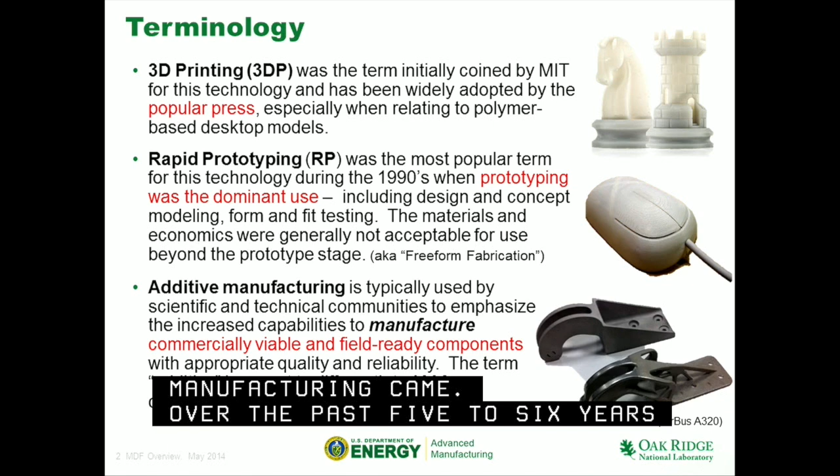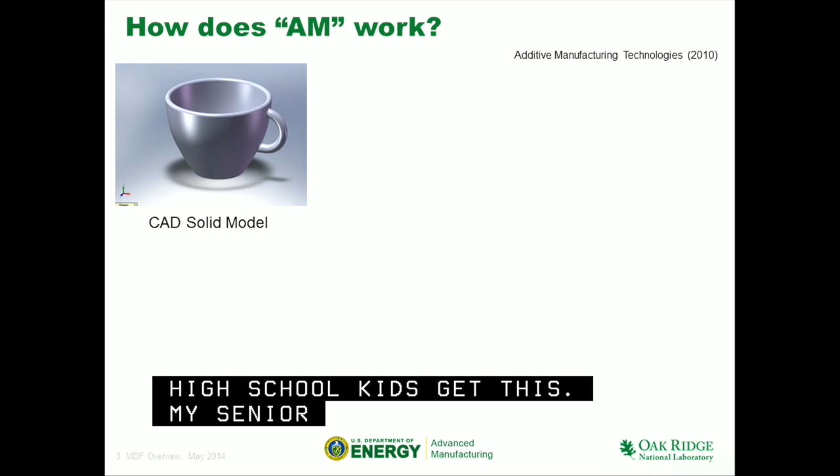The process is really simple. High school kids get this. My senior engineers sometimes struggle with this. You start with a CAD model, a three-dimensional model, and you create a standard file format, just like when you're using a word processor and you'll save to a PDF.

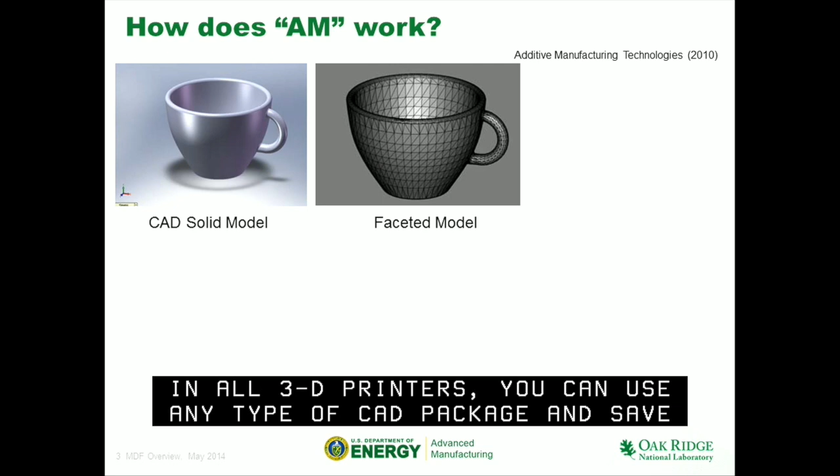In all 3D printers, you can use any type of CAD package and save it to a uniform file format called an STL. And then that STL can be used to come up with what they call slices. So you're taking this three-dimensional model, you're slicing it into layers, and then coming up with tool paths in which you're going to start to layer by layer by layer grow your part.

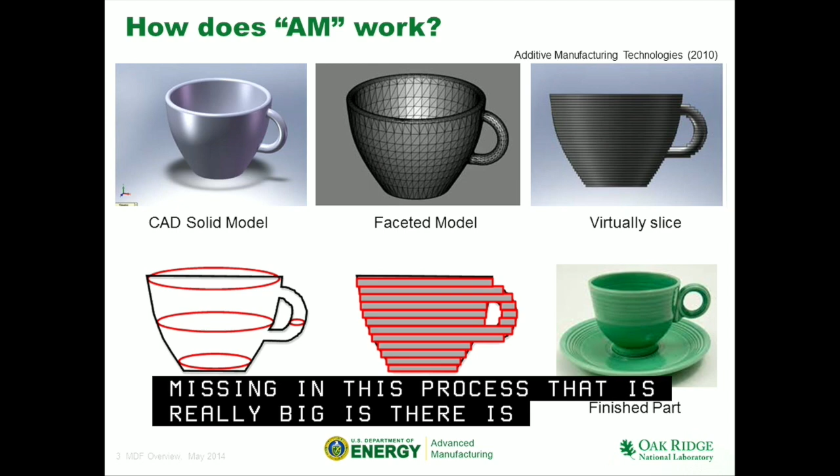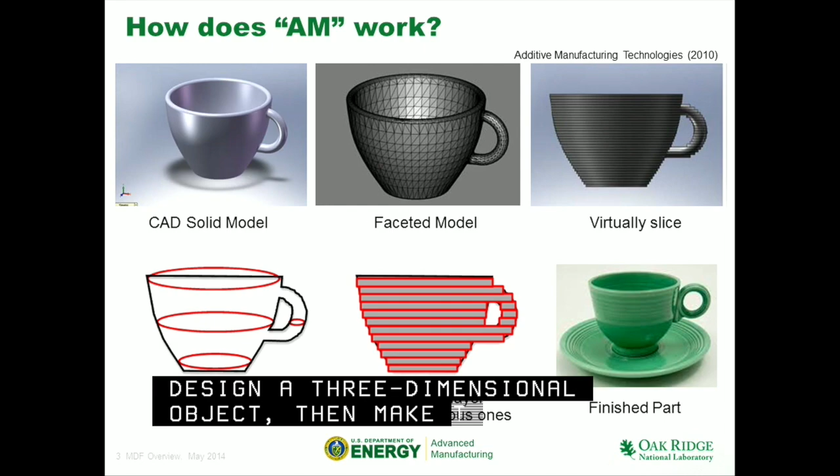So one of the things that's missing in this process that's really big is there's no machine drawings. You go straight from your CAD package to the printer. In conventional manufacturing, you design the three-dimensional object, and then you have to make drawing sets that you then give a machinist to actually do the machining. That's gone. It's just simply hit the print button. So it's a radical departure from how we've made things in the past.

Now, I work at Oak Ridge, and one of the questions that people ask is, well, why is Oak Ridge so interested in this technology? And in truth, I tell people Oak Ridge is the perfect place for trying to move this technology from really an infancy to its maturity. We have a lot of the fundamental scientific tools that are necessary to mature the technology.

So Oak Ridge started out during the Manhattan Project. We were a manufacturing facility, taking some very scientific, fundamental research in materials and making very specific materials. In 24 months, we went from the backwaters of East Tennessee. They kicked out a bunch of rednecks and hillbillies, and you had a factory of 15,000 people building materials to try to end the war.

And then afterwards, a lot of the fundamental tools that we used to win the war have blossomed into some wonderful tools. We have things like neutrons. Neutrons were really important for transforming uranium to plutonium, but you can use neutrons to do things like scanning parts to measure internal stresses in those parts. And you find that ends up being very important for additive manufacturing.

Whenever you're growing a part, you're melting a powder or melting a plastic point by point, layer by layer. Whenever you melt something, it expands, it cools, it contracts. So you get these internal stresses inside the parts. One of the only places to really measure that is at Oak Ridge. We can actually print a part, take it up to these facilities, the Spallation Neutron Source, High Flux Isotope Reactor, and I can measure the residual stress inside these parts.

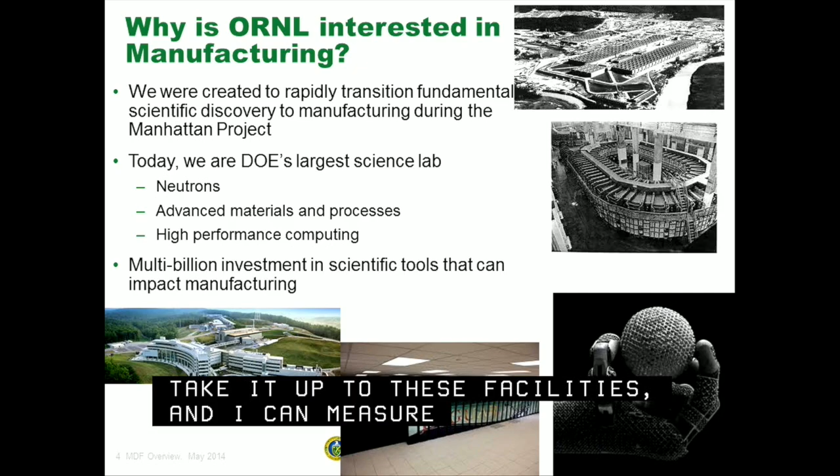Also, when you start looking at 1 cubic inch of material, that's equivalent to about 5 miles of welded powder, because I'm doing it point by point. So the way that I melt that powder, the directions that I take, how I orient the part, how I design the part, really takes high-performance computing. The way I grow that part is going to impact its behavior. So you really need high-performance computing to be able to model and simulate these processes, which is, again, what Oak Ridge has.

And then finally, it's materials. Oak Ridge is a materials lab. So we have all these fundamental building blocks that are really important for additive. And what we're doing is we're leveraging these really multi-billion-dollar public investments to help this industry mature itself. And so, again, Oak Ridge, if you're not familiar, there's about 4,400 employees, scientists, engineers. And again, we really are focusing on the materials, the neutrons, and the high-performance computing to try to mature the technology.

Where I work is the Manufacturing Demonstration Facility. And have any of you been to a national lab? I'm sure most. If you have, they're all kind of similar. Usually they're out in the middle of nowhere. They were built to try to isolate things. You're working generally with dangerous materials or dangerous processes, so they're in the middle of nowhere. They typically have a big fence around them with armed guards. This place is different. It's actually outside the lab, right in the middle of the public, and the reason is just that. We want to be accessible.

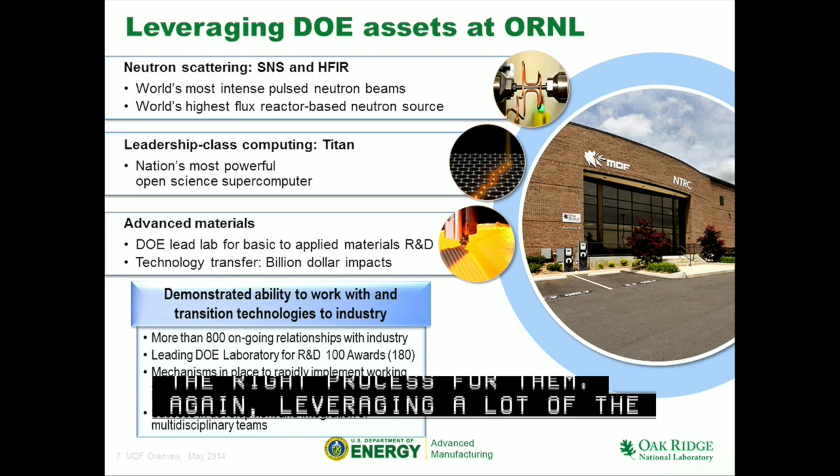And so what we do is we show them all the different processes and help them figure out what's the right process for them. And again, leveraging a lot of the fundamentals of the lab to try to accelerate going from a thought, a concept, to a real product. So there's three things that we really focus on. Every day when I go into work, there's three things I say, I got to at least do two of these. And the first thing is we work with the original equipment manufacturers.

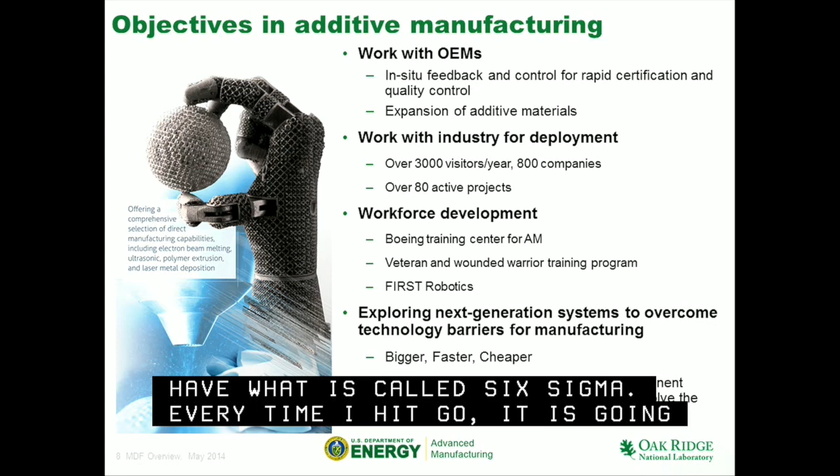So all the companies that make these 3D printers, we work with them directly to try to make them more reliable. And that's one of the Achilles heels of this industry right now. In typical manufacturing, you have what's called Six Sigma, which means every time I hit go, it's going to go, right? Every time I say make a part, it's going to make a part. Right now, the success rate of these processes is like 50%, 60%.

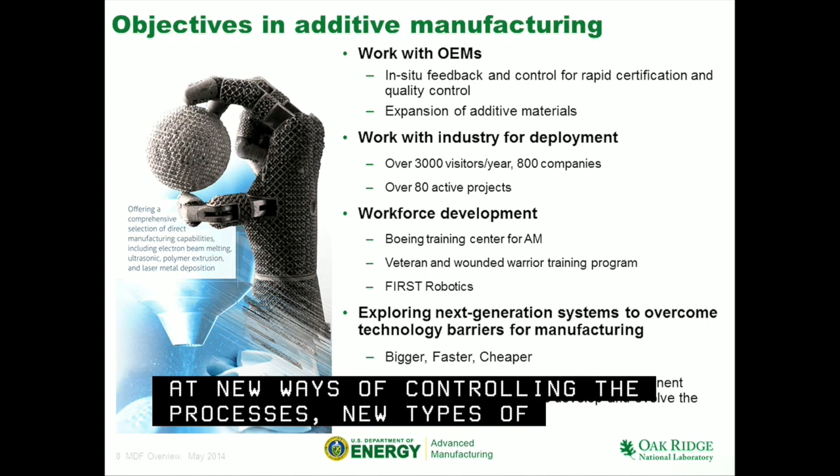So there's a lot of scrap. There's a lot of failed processes. So we're working closely with these companies to try to look at new ways of controlling the processes, new types of feedback, to try to get to Six Sigma, to where it's very reliable. The second thing, as I've already said, is working with the companies that are interested in the technology.

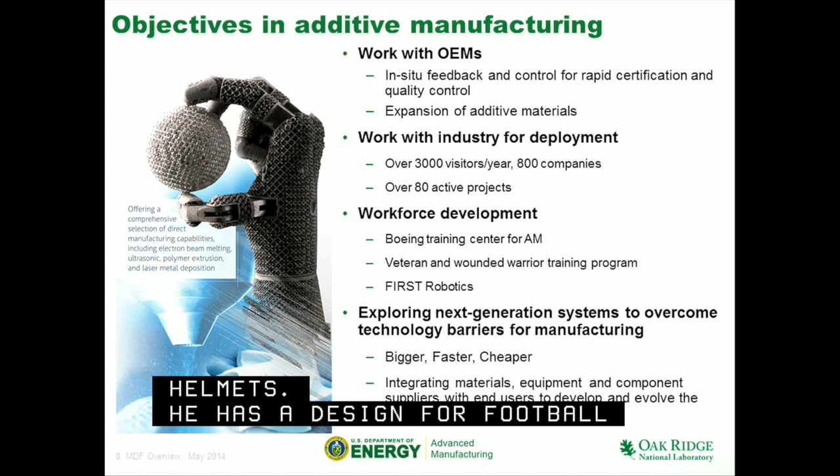I had a guy come in yesterday. He wants to make football helmets. I'm like, football helmets? He goes, yeah, he's got a design for a football helmet that will help with impact to try to keep students from getting concussions. And he thinks, and I think he's right, additive can enable you to come up with designs very rapidly that could really help students and athletes in terms of concussions.

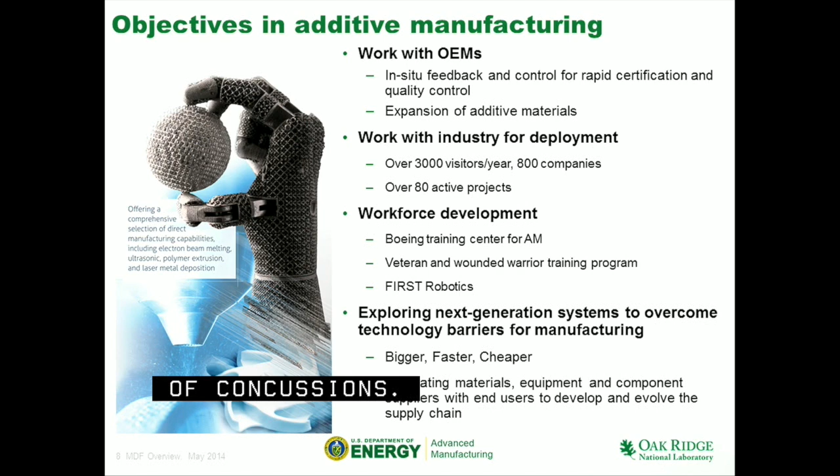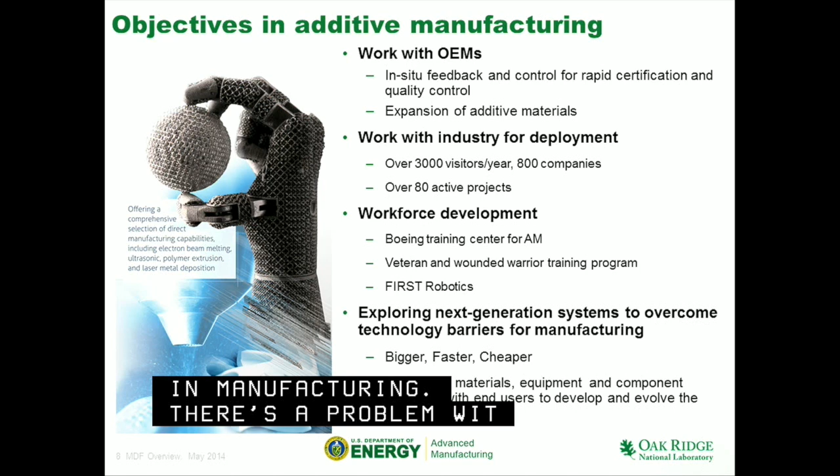So working with these companies to come up with prototypes and proving out that you can actually use the technology to develop new products. And the last thing is, as I said, we're going through a resurgence in manufacturing, right? We're starting to see an uptick in manufacturing. And there's a problem with this: where's the workforce? When I was in high school, I took machine shop. We don't have machine shops in high schools anymore.

I work a lot with the FIRST Robotics kids. I've had students come in and they'll use an open-end wrench trying to tighten up a nut. And I'm like, here, use a ratchet. Anybody know what a ratchet is? They don't know how to use it. They say, this is the coolest thing ever. Do you have another one to get it off? No, you just hook this little dial in the back and it'll go the other direction. So really trying to inspire these kids to go not just into engineering, and not just into mathematics, but to go into manufacturing.

And what I'm finding over the last 5 years, the 3D printers are like catnip for these kids. Because this is the instant gratification generation, right? They want it right now. Most of us that have kids, yeah, I know, right? These kids want it now. Well, 3D printers give them that. You can actually design something and print it and have it that night.

But from a business standpoint, they're also a challenging generation because they're used to cell phones. And what do you do with your cell phone every 2 years? Trade it in. So how are we going to keep these kids employed with our companies beyond 2 years, 3 years? Because they're used to just trying something new. So there's a really exciting inflection point right now as far as where manufacturing's going.

Also, we have another thing that's going on that I've learned. We ran a veterans program last summer where we had 25 wounded warriors and veterans come in, and we trained them on these advanced manufacturing processes. They were scooped up within hours after we were done working with them. It was a 6-week program. There's over 250,000 open manufacturing jobs in the United States.

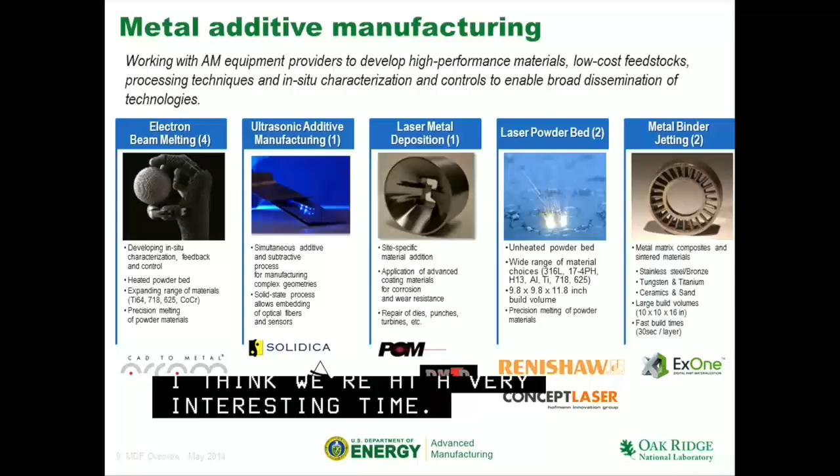And so how do we create this new workforce? And so I think we're at a very interesting time. So with 3D printers, there's a lot of different ways that you can grow a part. You can use lasers, you can use electron beams. They all have advantages and disadvantages. There's no silver bullet, but we can 3D print metallic parts.

And one of the things that we do inside our facility is we have just about every type. I'm not trying to sell machines, but what I want to do is when a company does come in to work with us, I want to give them the right advice. We can try different machines and find out what's the right one for them, because these are $500,000, $1 million investments.

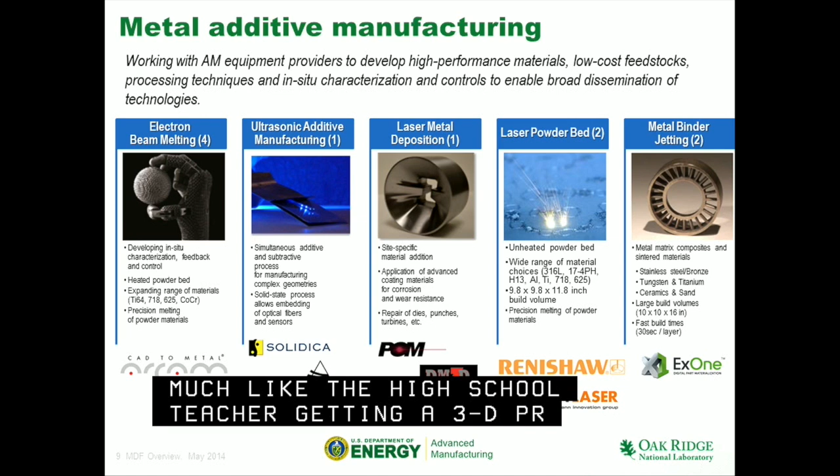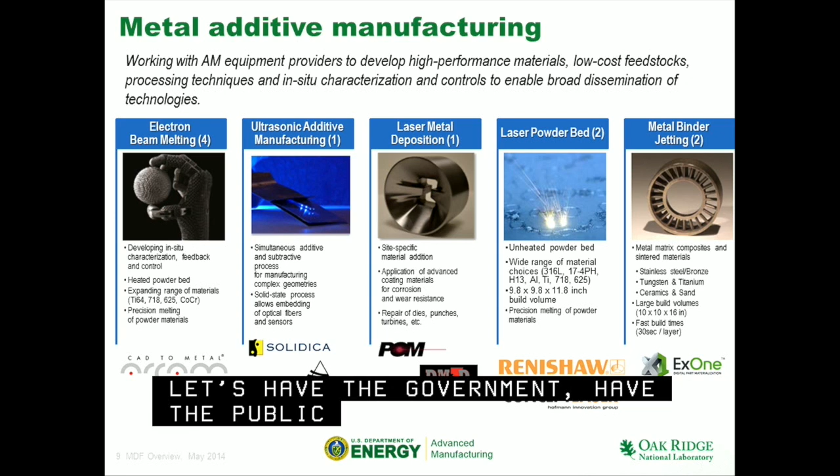So we use this process to actually look at how these different processes impact the material properties of these printed parts, because the last thing you want to have happen, how many of you fly? Everybody fly? All right, you don't want a part breaking when you're flying. And so really understanding the material properties of these additive processes is key. And so this is a video that kind of shows a turbine blade we made for General Electric.

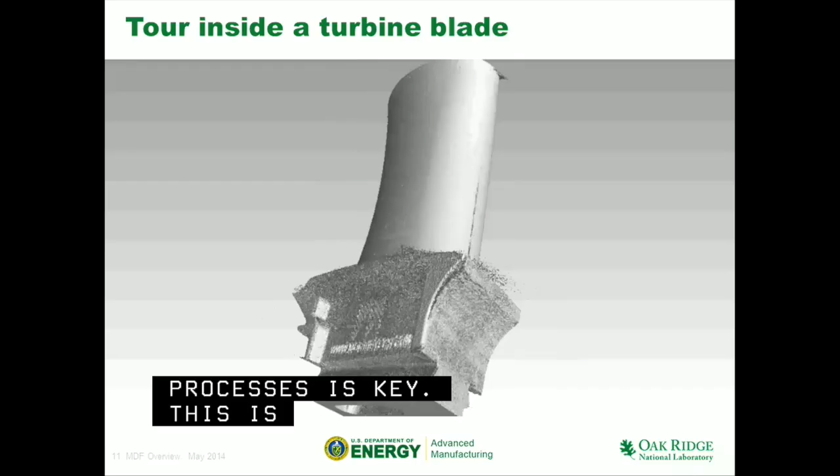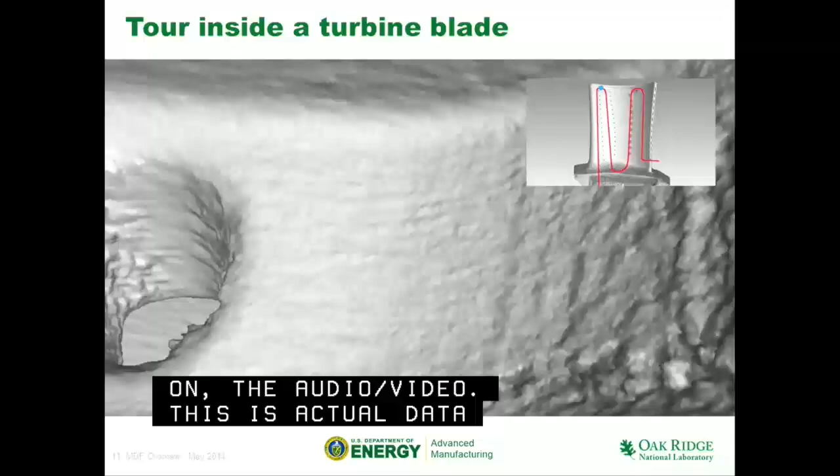So this is one thing we need to work on, the audio video people get this really weird groovy music going. But this is actual data, and it's kind of like Fantastic Voyage. We can actually go in and we scan the part, and we can go back in and ride through it and look for any defects in the part.

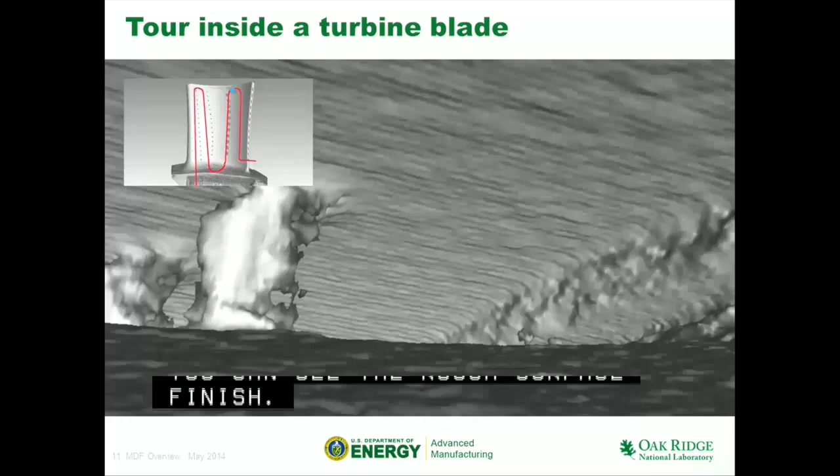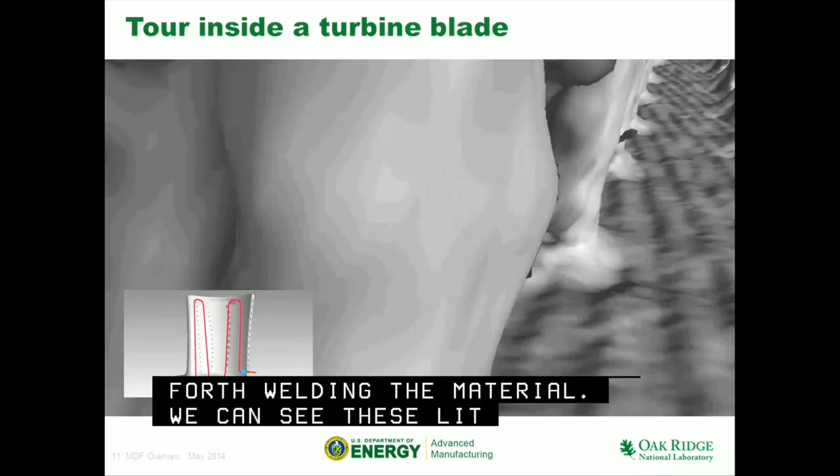So you can see the rough surface finish, but what's interesting is when you turn the corner up here, you'll start to see what are called strata, these lines that are created by the process when you're going back and forth welding the material. We can also see these little pipes. There's some defects in the pipes. So we can do inspection that we've never been able to do before and really understand how to modify the process to get the parts that we need when we're done.

Another thing that we're doing is, one of the big questions that's been asked is, can you get the same mechanical properties from these processes that you get from traditional manufacturing? And again, I don't want to make a part that's going to bring a plane down. And the surprising answer is, you can go better. One of the things that we can do through these processes is locally control mechanical properties. I can change my grain structure within the material in different areas.

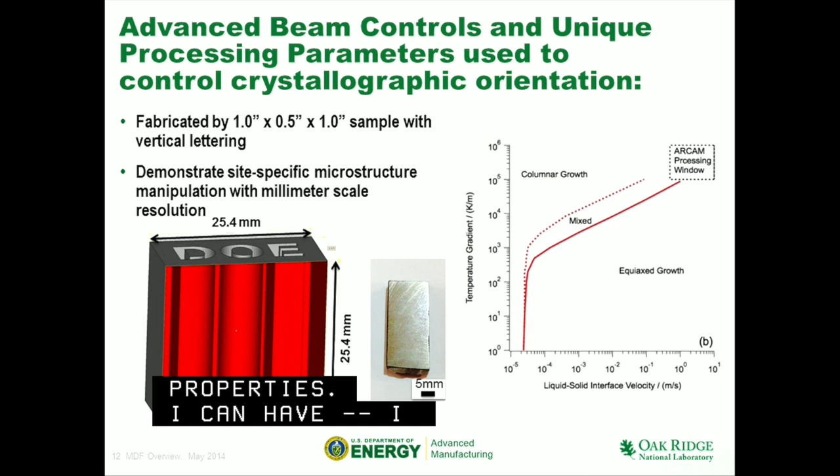So on that turbine blade, imagine you have an area where it has the propensity for a crack. And it looks like if it starts to crack, it's going to go to a critical area. Well, I can design the grain structure to direct that crack away from sensitive areas. So you can do things with these processes we haven't been able to do before.

And as an example, one of my colleagues, Ryan Dehoff. I'm a designer. I'm a robotics guy at heart. And I use these processes to try to create really cool examples of where the technology can go.

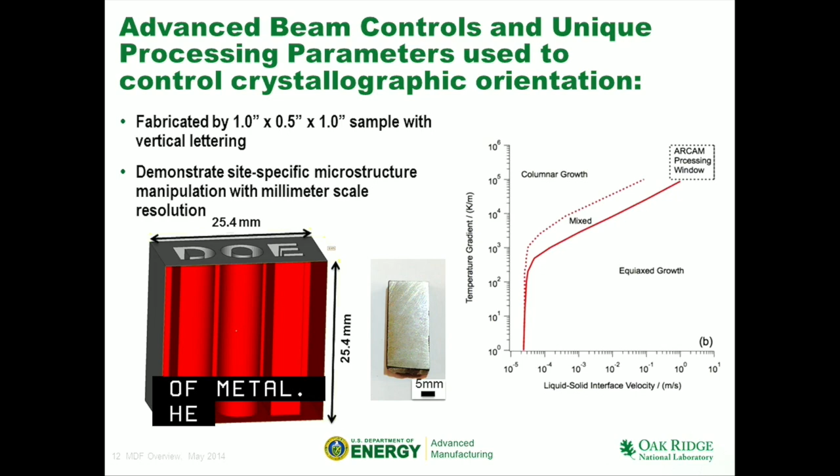Ryan is a metallurgist, and so Ryan comes to me one day, and we always are going back and forth competing with each other. And he comes to me with this little block of metal, and he goes, "This is going to blow you away." And it's just a little cube, and I'm like, "I'm sorry, I need to teach you CAD, son. This is ugly." Well, what he did was, if you section it and you look at the grain structure, you can see it spells out DOE.

So he can actually control the grain structure of the material, the metal, as he's growing it. This is a game changer in terms of this process. We can do things now with this process we've never been able to do in the history of manufacturing.

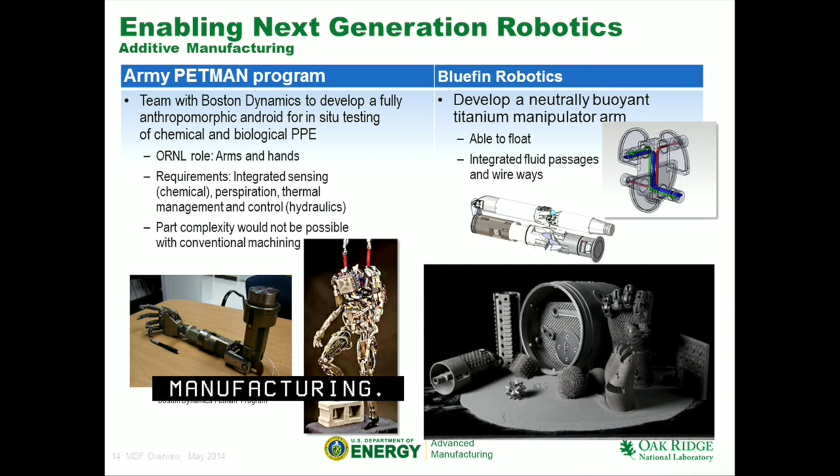Again, my background's in robotics, so again, looking at novel ways to use it. A lot of work in hydraulics. So this is a hydraulic hand that we made for the Secretary of Energy years ago, really to start to try to get people thinking about where additive can go. The picture on the left went kind of viral. It's a robotic hand. Looks very lifelike. It actually looks kind of Terminator-ish with this mesh, but it gets into the strength of the process.

Number one, with most manufacturing processes, the more material you take off, the more expensive it is. It takes energy to remove that material. You have scrap, and it takes longer. With additive, it's just the opposite. You're only using the material you need. So the lighter you make the part, the less powder you need, the less energy you need, the faster it's going to go, the cheaper it's going to go. So it really does get to this whole lighter, faster, cheaper paradigm shift.

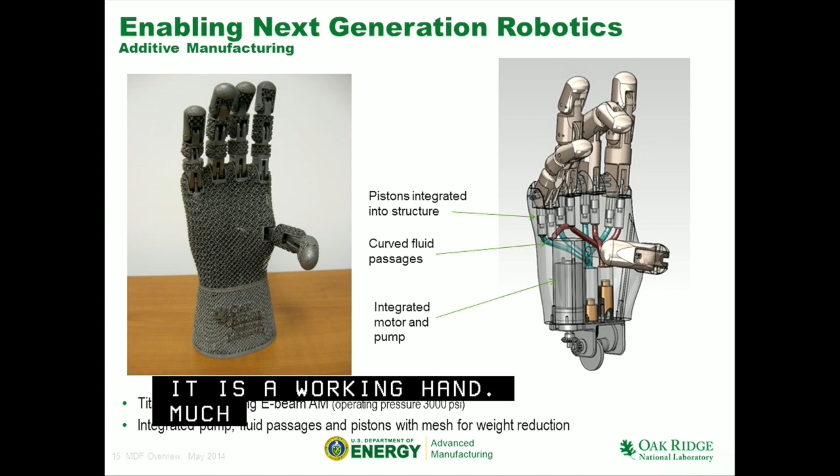But the other thing that's really fascinating is I'm not limited to straight lines, round holes. On this hand, everybody sees what's on the outside, but for me as a designer, what's on the inside is really cool. I have a hydraulic pump, turn on the motor, the fingers will wiggle. It's a working hand, and much like the veins in my arms, the fluid is routed in very organic directions. So again, making it more efficient, making it lighter, making it simpler.

We've then taken this and expanded it to a full set of robotic arms. These are arms that are all hydraulic, and if you'll notice, there's no hoses. Most hydraulic systems, when you look at an excavator or a backhoe, you got big hydraulic hoses all over the place, and those are where your leaks happen. These are hydraulic arms where, much like the human body, all the hydraulics is integrated directly into the structure. Also, we make them very lightweight.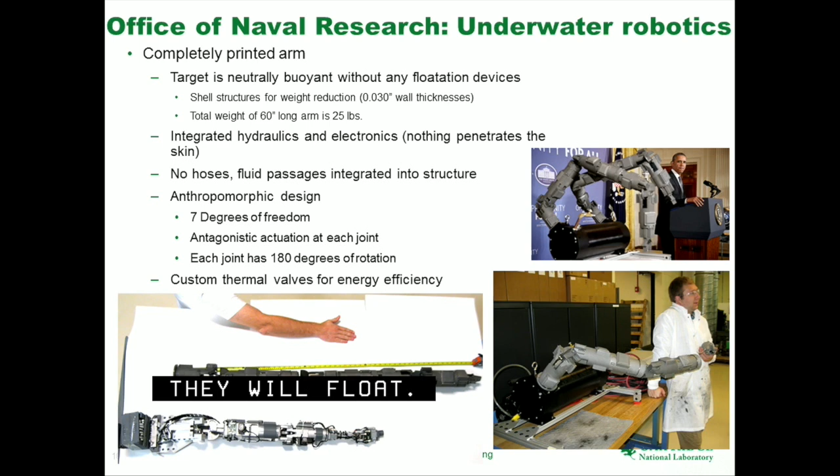They're hollow on the inside. You take these titanium arms, you dump them in the water, they'll float. All right, so they're neutrally buoyant. They've been deployed out in the Navy. The Navy made these for the Navy. They deploy them on submersibles and fly underneath ships to do inspection and repair. Doing a lot with the polymer systems.

One of the things that I wanted to get to is we've worked with a lot of the companies on the metal machines, a lot of companies on the polymer machines, and about 3 years ago we made a discovery. As I mentioned, when you look at all of these processes, you're melting metal or you're melting plastic, and you generate a lot of residual stress, and that stress will want to make the part curl and warp on you. If any of you have ever worked with a little 3D printer, if you make a big flat part, it'll want to curl up on you like a potato chip.

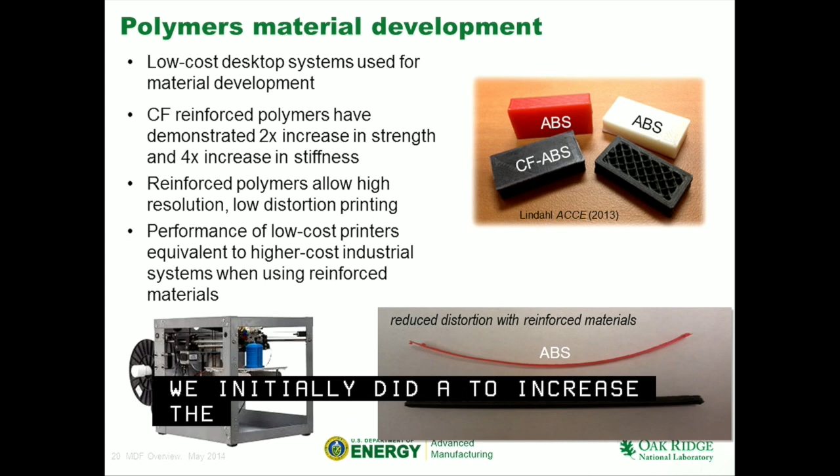Well, one of the things we discovered, especially on the plastics, is if we put carbon fiber in the material, things get better. We initially did it to increase the strength and the stiffness of the part, but what we found was it changed thermal conductivity and coefficient of thermal expansion, which means I don't need an oven. All of these 3D printers are in ovens to keep the part nice and hot. I don't need it. I can do it at room temperature. The part won't warp and curl on me.

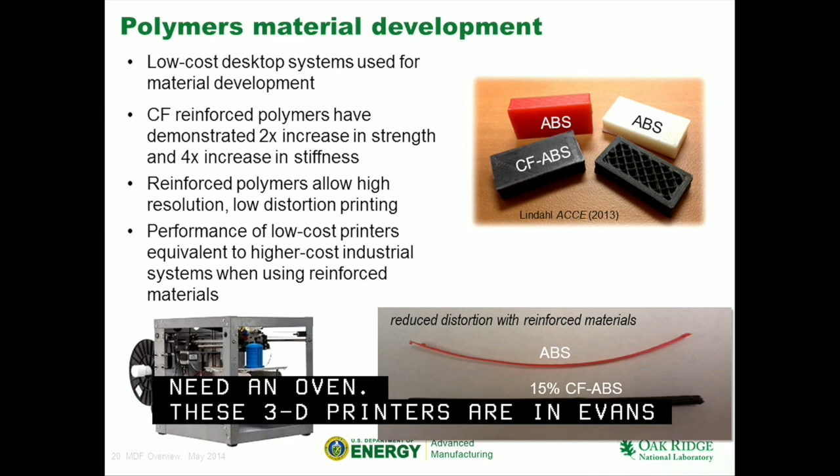And so what we started looking at is, well, how scalable is this? Can I make really big things? Almost all 3D printers are categorized in a couple of simple ways. First off, they're small. I can make something the size of a shoebox. They're slow. Usually you're growing parts at about 1 cubic inch an hour.

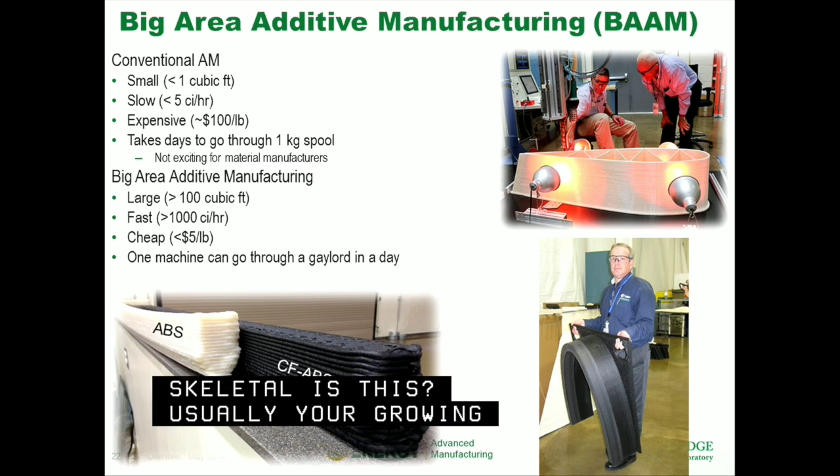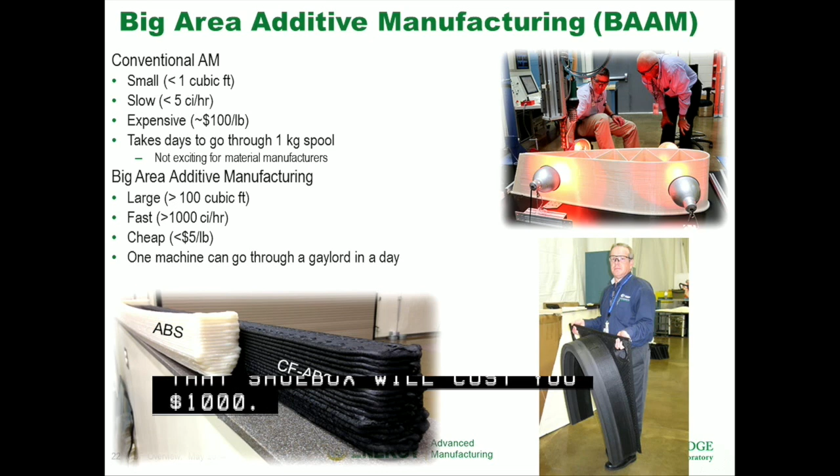So that shoebox is going to take you all day. And then the materials are expensive. They're typically $100, $200 a pound. So that shoebox is going to cost you $1,000, right? And whether you're talking plastic or metal, that's the fundamental problem.

Also, when you look at these 3D printers, I'm a part of the Department of Energy. Energy is important. 95% of the energy going into that 3D printer is in the oven. So if I can develop new materials that allow us to work outside the oven, I'm going to increase my energy efficiency of that process by over an order of magnitude. So it's a real game changer in terms of energy.

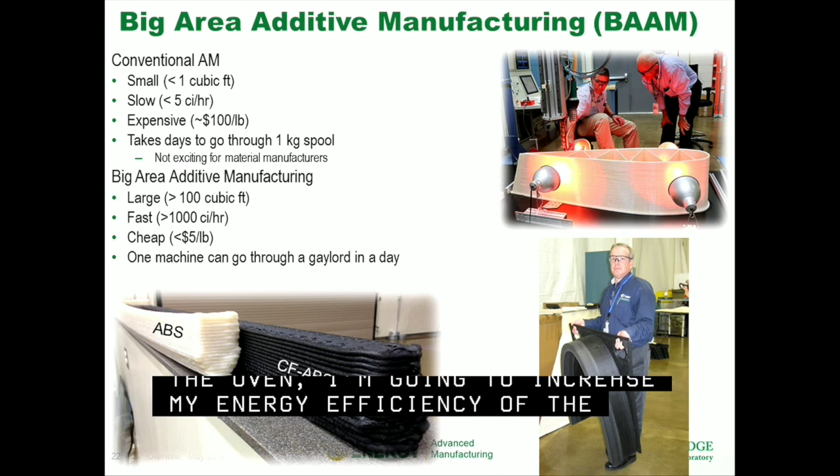So we started about a year ago looking at scalability. So instead of making something the size of a shoebox, can I make something the size of a car? Can I make something really big? Instead of having a 1 cubic foot build volume, we have a machine now that has over 1,000 cubic foot build volume. Instead of growing things at 1 cubic inch an hour, we're going over 2,500 cubic inches an hour. Now we're measuring it in terms of pounds per hour.

We're growing parts at about 70 to 100 pounds of material an hour. So putting down a lot of material. And most importantly, the cost is cheap. So I like big, fast, and cheap. The materials are $2, $3 a pound.

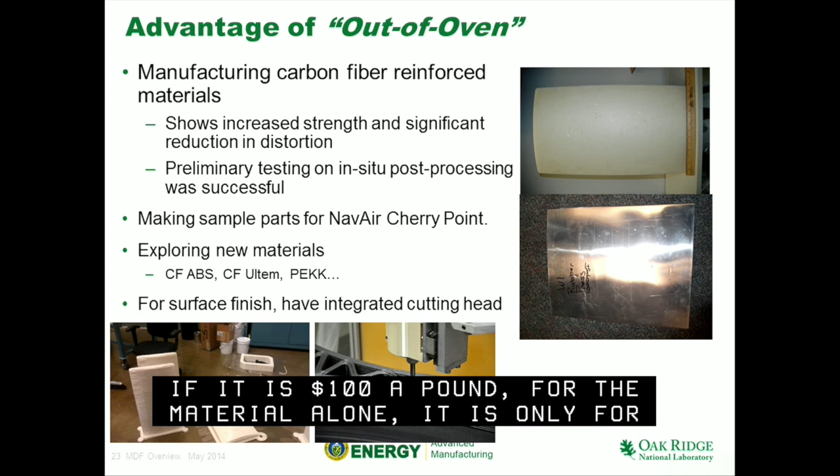And that's important because now if you're starting to talk about making something the size of a car, that car may weigh 1,000 pounds. If it's $100 a pound for that material alone, it's only for the high-end market. But if I'm talking about $2 a pound, $3 a pound, all the material going into that car is going to be $2,000, $3,000. And so that's a real game changer.

So another thing that I think is important is a lot of people think that national labs move at a glacial pace. I've heard that many times. Nothing could be further from the truth. If you are motivated and you have a belief in what you're doing, we can move extremely fast. And this is one of the things that I think our society is missing: we need moonshots.

John Kennedy was absolutely awesome, he was bold. He said, by the end of this decade, we're going to get to the moon. And it provided focus, it provided drive. We need moonshots, and I'm a big believer in that. And so we're putting out a series of moonshots. And one of them was, can I print a car? And this whole program started just over 2 years ago.

Back in January of 2014, we were making big parts, but we were doing it in a lab. And we had a company, Cincinnati Incorporated. Cincinnati Incorporated is a 116-year-old machine tool manufacturer. They make big hydraulic presses. They're not a 3D printer company. They sold Henry Ford his first hydraulic presses. And what's great is 100-year-old presses still work. This is a company that is kind of the foundation of our country.

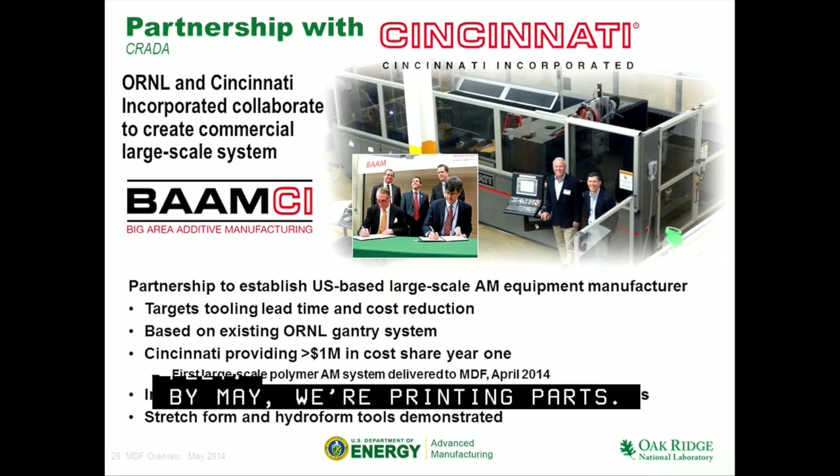And so they came into our facility, they saw this big 3D printer, and this guy goes, I think we can make this. I think we can produce this. This is in January of 2014. So in March, we signed our Cooperative Research and Development Agreement, which basically lays down the framework for how we're going to work together. April, they deliver their first gantry system. It had a build volume of like 7 feet by 13 feet by 3 feet. And by May, we're printing parts. So literally going from having nothing to, in 4 months, printing big parts on their machine.

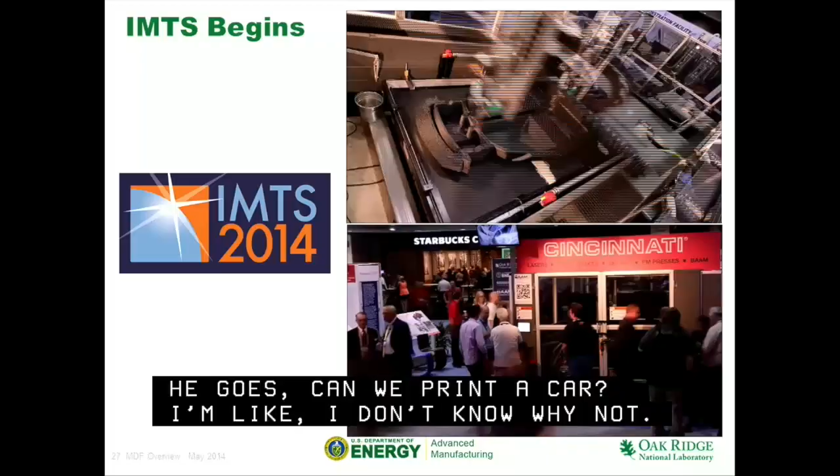Well, then we had another company come in, Local Motors, and Local Motors is an innovator in terms of cars. And this guy, Jay Rogers, comes to me, and he's watching this 3D printer, and he goes, can we print a car? I was like, I don't know why not. 30-minute conversation. He went from making very expensive cars on the order of $100,000 a piece to his target is to mass produce customized electric vehicles.

He's actually building a factory up here, National Harbor. He made an announcement he's going to build a micro factory in National Harbor. And the idea is small, customized electric vehicles, where much like today, when you go and buy a car, you go into a dealership and you walk through the lot, you find one, you pick it, you go.

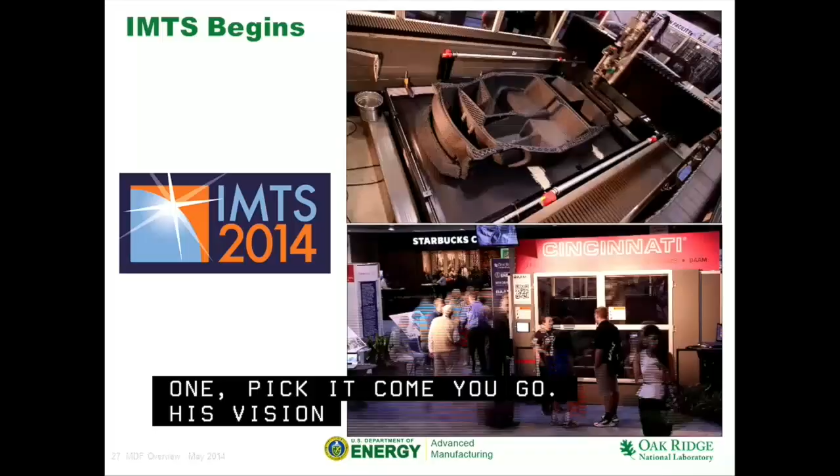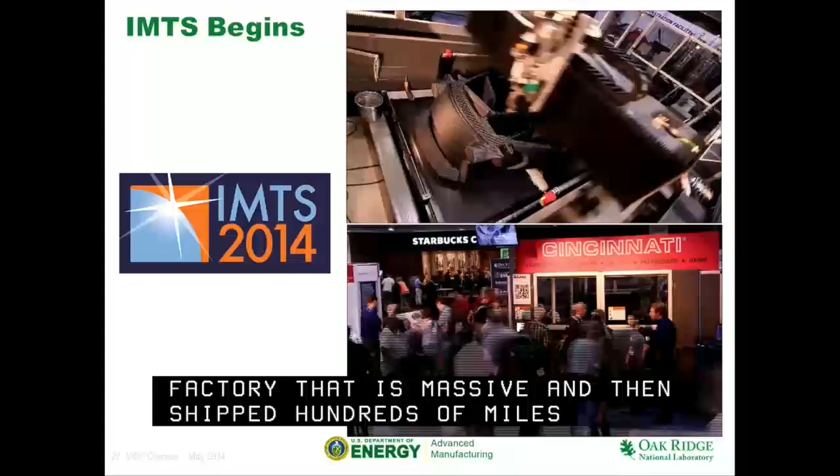And that car, by the way, is exactly like the one right next to it. It might be a different color. It might have a different interior style, but you really don't have a lot of options. And that car is mass produced in a factory that's massive and then shipped hundreds of miles to your dealership. His vision is to go back to pre-Henry Ford.

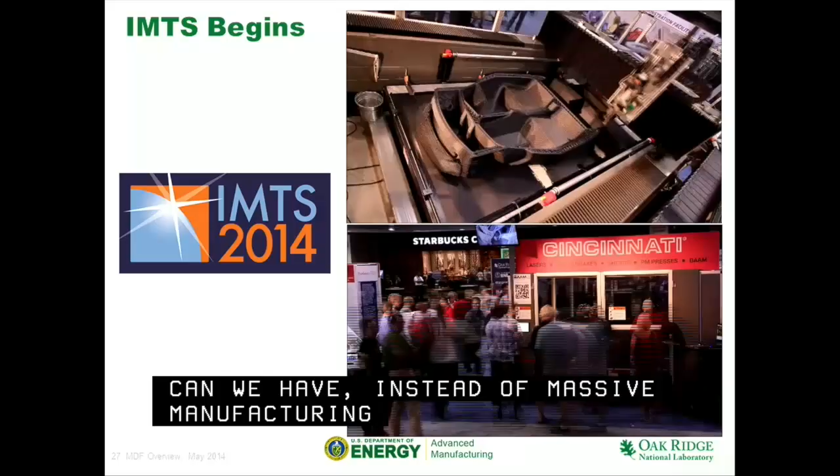Instead of massive manufacturing facilities, his goal is in 10 years to have 100 microfactories around the United States, where it's a small town. You have factories that are not producing one type of car. Instead of one big assembly line, it's got a number of these big printers printing cars. Now, whether this is going to work or not, I don't know, but it's bold.

But the idea is you go in and you say, I'd love to have a 1963 Corvette, but I'd like to change this body style a little bit. And you sit down with a designer and you design it. And then you go away, you come back the next day and it's done, right?

You could say, I want to have a 1935 Buick. You could say you want to have the Wienermobile, whatever you want. It doesn't matter. It's 3D printing. There's no tooling. It costs nothing to change the design. So it's completely flexible. And then the economics are very interesting.

Again, this body, the video on the top was in September of 2014. This is last year. It's crazy how fast time goes. 6 months from the time we signed our contract with Cincinnati, 5 months from the time we signed our contract with Local Motors, we're up in Chicago printing a car where they actually drove it out of the facility. And you can go online, the story is all over. These guys are like the pros of promotion.

They're absolutely amazing. So after the Detroit Auto Show, I came back and the Department of Energy was wanting to have the car go to all these different places, but it wasn't ours. Oak Ridge DOE doesn't own the vehicle, Local Motors does, and so they asked a simple question: would you be willing to print a car for the Department of Energy? Dumb question, right? Of course.

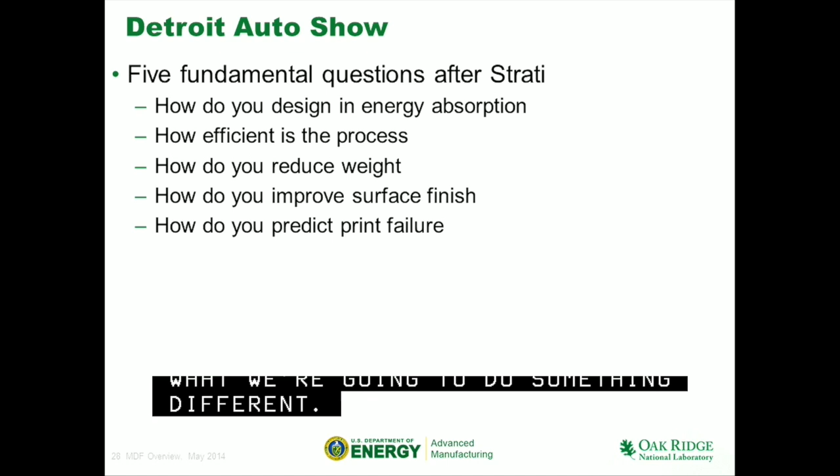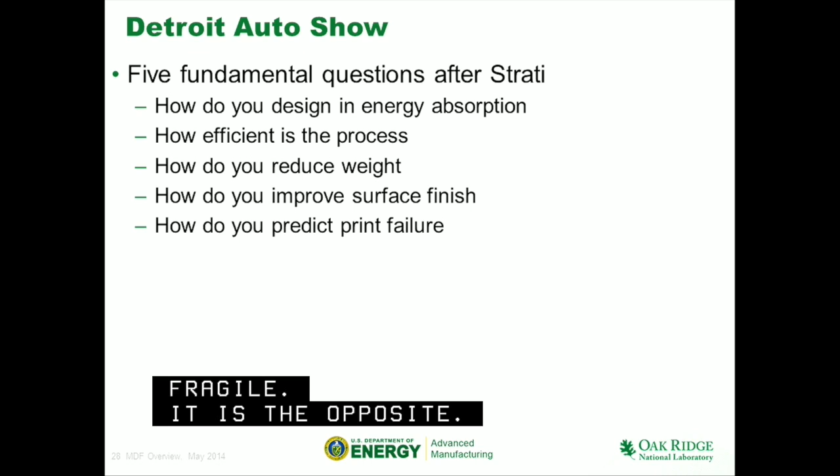But we're going to do something different because a lot of questions were coming out about the car. Number one, safety. What happens when you get into a wreck? And the big question is we don't know. A lot of people think that this thing is fragile. It's just the opposite. When we were up in Chicago printing the car, I took one of the fenders and took a sledgehammer and was beating it. You couldn't break it. It's a composite. It's carbon fiber reinforced plastic.

It's tough. So my concern is not that when you get in a wreck that the person is obliterated. It's just the opposite. It's not going to absorb energy. All that energy is going to be imparted to the passenger. So are there things we can do in the design to make the system safer, even safer than a typical car? And I think there are.

Most crash tubes are designed to just take impact in one direction, right? They're a tube. But we could design organic structures that could take impact from any direction and absorb energy. And we could also do multi-material. The flexibility, the degrees of freedom you have to work with are enormous.

So in terms of safety, I would say, yeah, it's not safe now. If you get into a wreck, it's going to just obliterate whatever. It's like driving a 1973 Ford. You're going to obliterate whatever you hit, and the passenger's going to absorb all the energy. So how do we get around that? How do we develop new cars that are printed, that are extremely safe?

The other thing was the surface finish. Whenever you look at these 3D printed parts, they have like this scalloped edge. How can we get something that has a smooth surface finish? How much energy does it take to grow a car? Again, I'm coming from the Department of Energy's perspective. Energy in manufacturing is really important. And so we started this really aggressive program. This was a 6-week program, another moonshot.

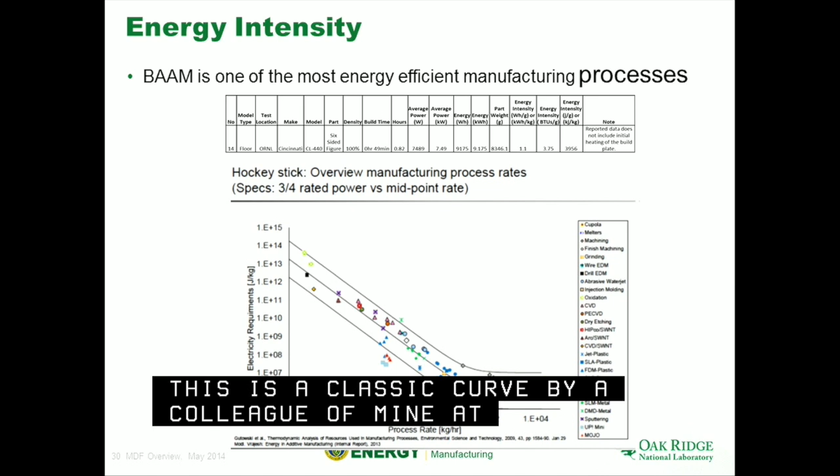We started looking at the energy that it takes to manufacture something with this process. And this is a classic curve by a colleague of mine at MIT, Professor Gutowski. What it plots out is the energy intensity, the amount of energy it takes to make something per kilogram, on the vertical axis, and your speed on the horizontal axis. And you get this hockey stick curve.

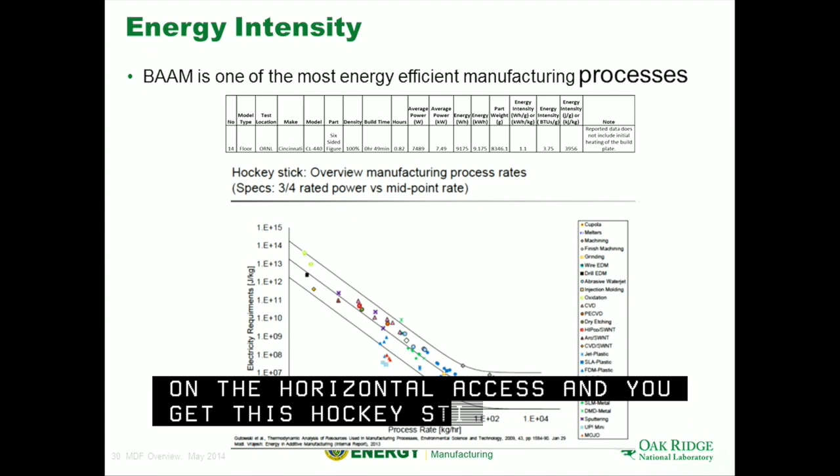Most high-end processes, real fine production processes, take a lot of energy and are very slow. This large-scale 3D printing is just the opposite. I can make very detailed things at a high rate with very low energy.

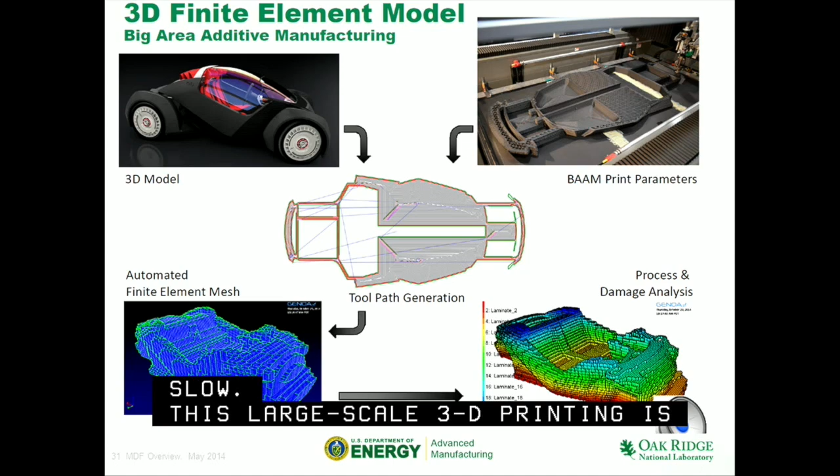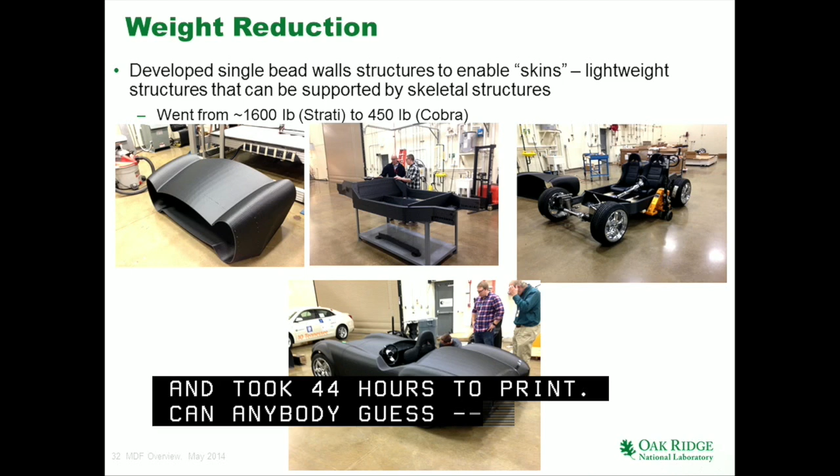And then the final thing was lightweighting. We were also asked about lightweighting. So the Strati weighed about 1,600 pounds. It took 44 hours to print. You guys know, we printed a Cobra, right? And so we were looking at lightweighting that structure, and instead of weighing 1,600 pounds, we got it down to about 450 pounds of printed parts. And this took just about 24 hours to print.

And one of the funny stories behind this was we had complete freedom in terms of what we were going to make. We could have made a Ford Pinto, but who would have been excited about a Ford Pinto? My dad would have. He had 2 of them, but I don't think anybody else would be excited about it. And the interesting thing is, it would have cost me the same to make a Ford Pinto as it did a Shelby Cobra.

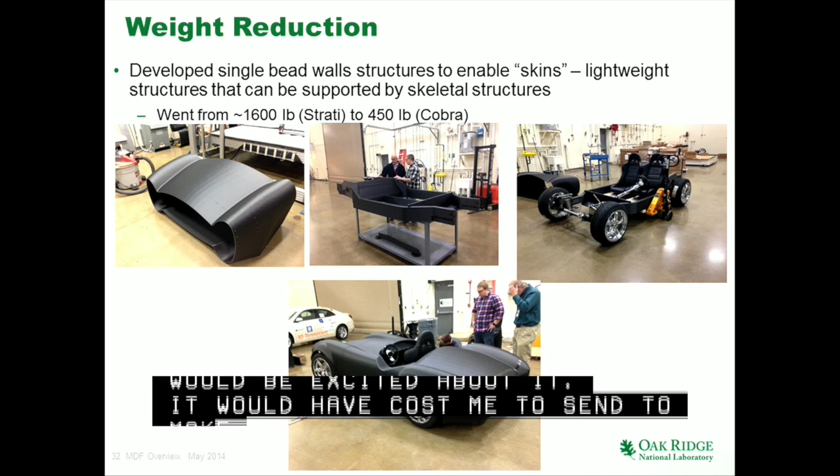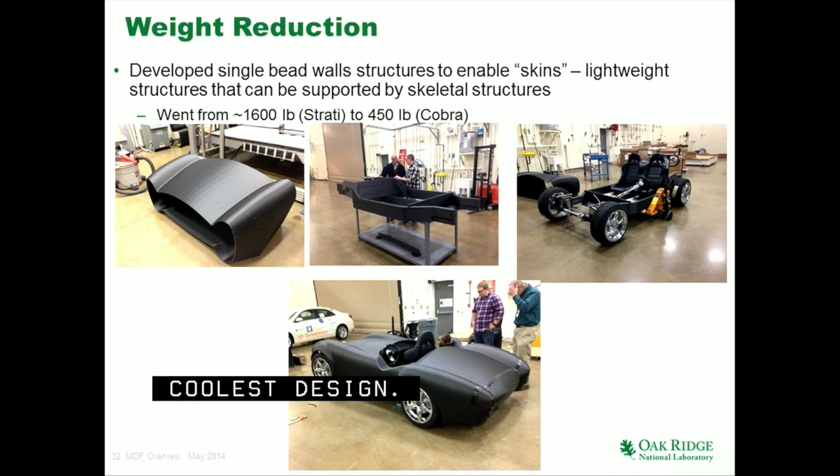And so as we started this process, the first week was design. I had myself and 2 other engineers, and we didn't know what we were going to build, so we said, let's have a little contest. Let's see who can come up with the coolest design. And after day 3, we decided we all 3 would have been fired by auto manufacturers because we were terrible at designing elegant cars. So we went online, found the data for the Shelby Cobra, and started printing.

The next thing was the surface finish. We partnered with a local company, TruDesign, and they started looking at coatings. When this comes off the printer, it looks like corduroy. You have this rippled surface finish. It's cool, but when you think about a car, you want a real smooth surface finish. So we partnered TruDesign up with BASF, 3M, and Eastman to look at what are the right coatings, so I don't have to sand it, I spray it on, and I can get a really beautiful surface finish.

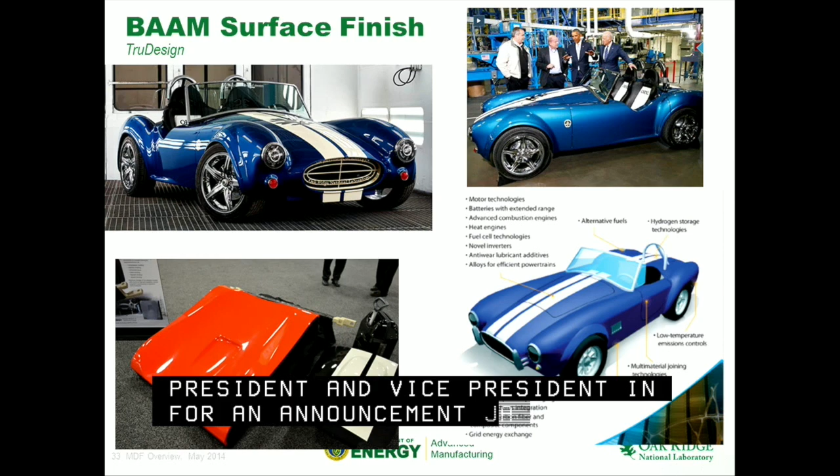And so the final product was in the upper left-hand corner, the Cobra. We had the president and vice president in for an announcement January 9th, so that was the first target. But then we had to turn around the next day and take it up to Detroit for the Detroit Auto Show. We had it at Detroit with all these beautiful cars, and it's the only 3D printed car there.

The first day, everybody's walking by. Nobody's asking any questions. And I'm feeling like, man, we just wasted a lot of money. My boss is going to be really mad at me. Literally, we had no one talking to us. And a guy comes up the second day and goes, what's the story with the Cobra? And I said, well, it's printed. He's like, no, it isn't. I was like, yeah. And I showed him the little areas we had left.

Like on the hood, you can see an oak leaf, and the oak leaf is clear coated, so you can see the lines from the printing underneath. And he said, this is crazy. And he says, you need to put a sign on this car that says, yes, this is 3D printed. So we put a sign on it. It went crazy. It went absolutely viral.

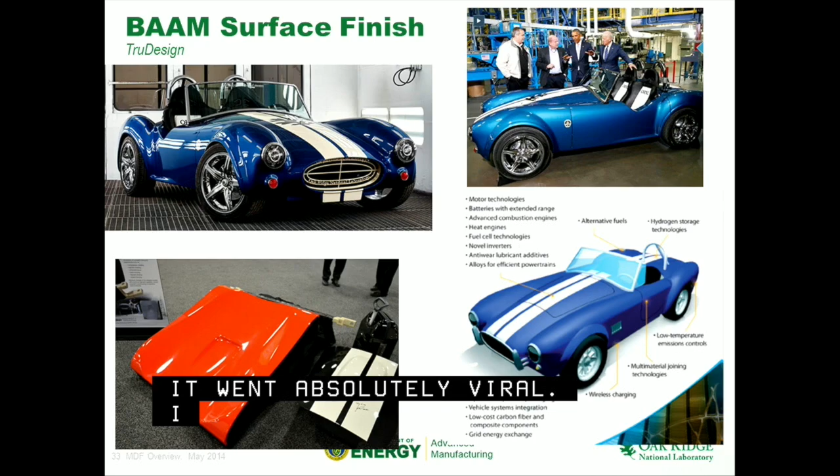And that was the fundamental test. I didn't even think about it, but afterwards it was like, this process has matured because we had people walking by not realizing it was printed. It looked so real. So now we're trying to go even bigger and even faster. So the first system we put together had a build volume of 7 feet by 13 feet by 3 feet. And we used that to print the parts for the Cobra, the parts for the Strati.

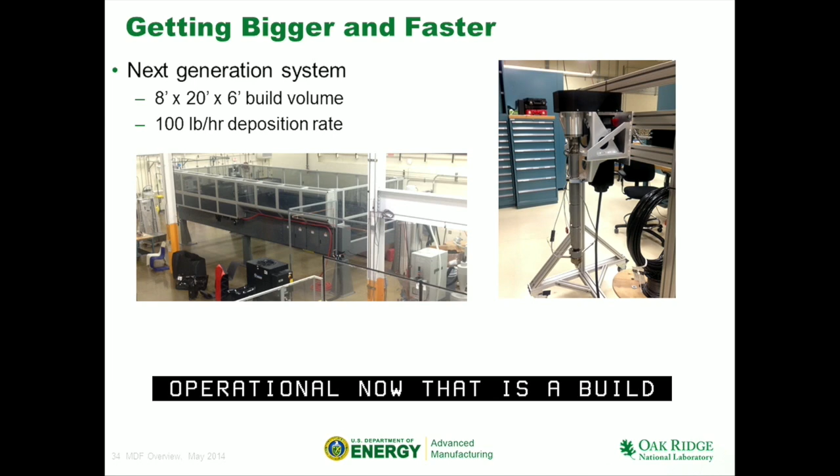We have a new system that we're putting together. It's actually operational now. It has a build volume that's 8 feet wide, 20 feet long, 6 feet tall, and it's producing parts at about 100 pounds an hour. And our target is to print a home, a small home, one of these mini homes. We've partnered with Clayton Homes and SOM, Skidmore, Owings & Merrill. They're a large architecture firm.

And what's going to be interesting is, you have plug-in hybrids. We're going to do the opposite. Instead of having the house and the grid charging the car, this is for off-grid opportunities. And it's also for developing countries. Can we have the car be an energy source for the house? Take power with you. If you look out in your parking lot, there's a lot of power just sitting there, idle. You only use your car for maybe an hour. Well, up here you may use it for 2 hours a day. But you don't use your power plant very much.

And so we're not going to be using the Cobra. We have a new small utility vehicle we're printing whose main energy source is natural gas. It has a couple of big natural gas tanks in it, and that drives a Honda generator, which charges a battery, but also can be used for propulsion on the car. But even better is it has wireless coils that can then inductively send power to the house. So now this starts to open up some really interesting questions.

I read this book by Maury Klein a few years ago called The Power Makers, and it really documents the evolution of energy in the United States. In the late 1800s, the current wars between Westinghouse and Edison, and the big solution was, look, in terms of energy and power production, scaling laws say we need big power plants. Big power plants are cheaper. One massive power plant is a lot cheaper to make than hundreds of smaller power plants. And so you go big power plant, that means you've got to transmit power over a long distance.